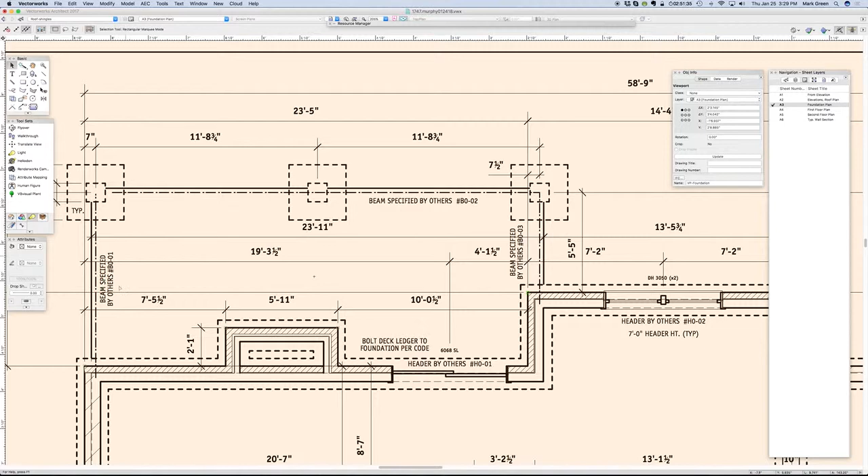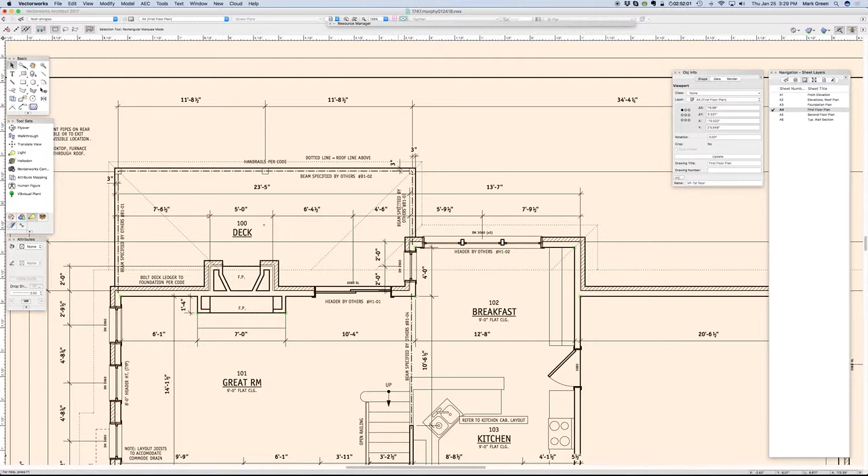So for the beams that have been placed, we're just checking that the numbering system didn't get off. So here's 01, here's 02, here's 03. There are no other beams on this floor. I know that because I did it. On this one, again, starting in the upper left, beam 01, 02 is here, 03 is here. Here's the beam here, there's 04. 05 is down here for the garage door.

Okay, so you're working both left to right, top to bottom, and or clockwise. And anything is fine as long as you don't have like 1 down here on the front porch and 2 up here in the middle of the house and 3 over here in the garage. If you're not crisscrossing back and forth, as long as there's some systematic method to the numbering, that's fine.

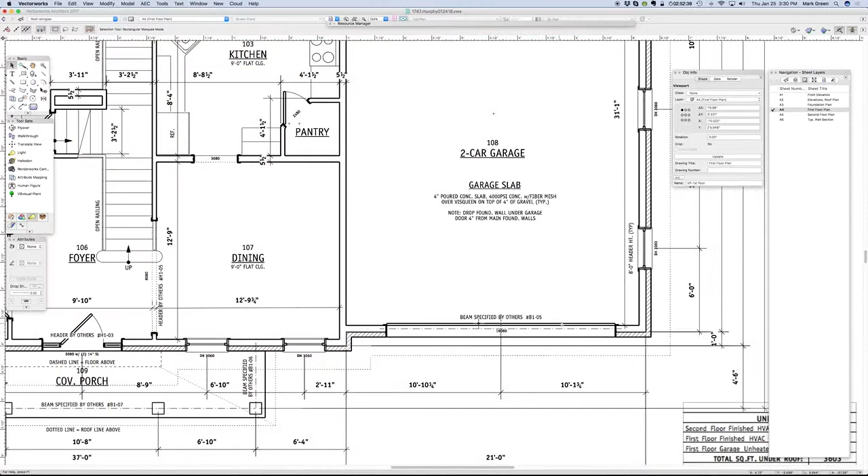So 5 is over here, and then 6 along the side of the porch, 7 along the front of the porch, and 8 along the other side of the porch. Just scan everything real carefully to make sure you've accounted for all the beams. For headers, same thing. You're going upper left, first around the perimeter, and then second through the house.

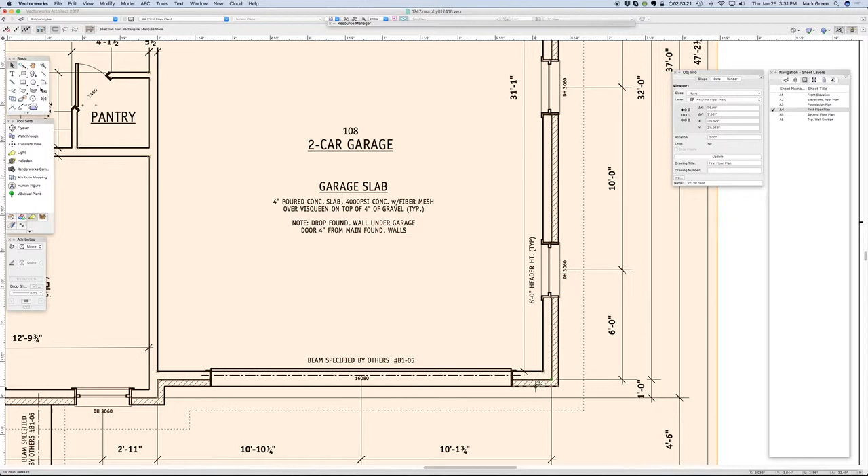Beams are always structural, like this one is structural. You got a big opening between 2 rooms. That's structural. That's not just going to be a header. A beam would also be on garage doors if you're carrying brick above, etc. They're structural in nature. If these were just regular garage doors, like 9-foot or 10-foot garage doors, it would just be a header, especially if they were in siding. If they were in brick, I'd put a beam. The note would say beam as opposed to header.

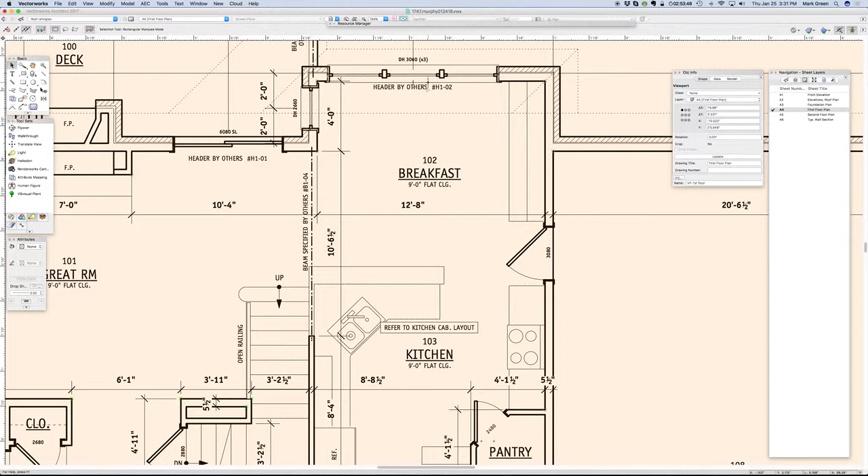Headers to me are for larger sliders or French doors or triple windows or double windows, or even inside where there's larger openings, like this one right here, double door. So again, checking, this is 1 up here, just going clockwise. 2, literally go around the entire perimeter. I come to this one, that's a beam, so skip that. I'm looking for 3. There's 3, header. And then here's 4 over here and 5 over here.

I'm looking to account for most all of the beams and headers. There's going to be another layer after me. It's going to be an engineer that's looking at this, so he will catch anything. I'm sure there will be something with this floor line here and with the beam to carry that for the second floor, but the builder didn't tell me, and I'm not going to guess how they're going to frame this up.

Up on the second floor, there were just a couple double windows on this house, and they're back here. H2 for second floor, header 2, 01, 02, and everything else was a single window, so it did not get a header. Also for this note, you're specifying in 2 or 3 locations the typical header height. So on the second floor, it's typically 8-foot tall walls and the header height is 7 foot. So I did a typical one here. There's one back here on this window, and there's one on this window back here.

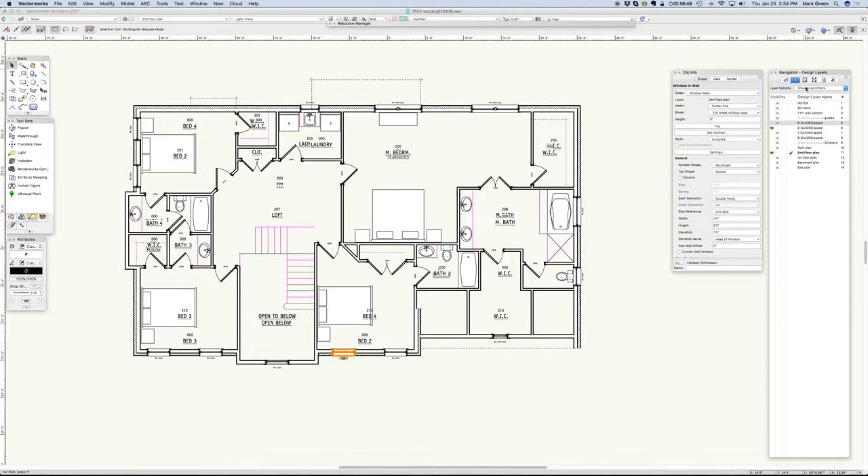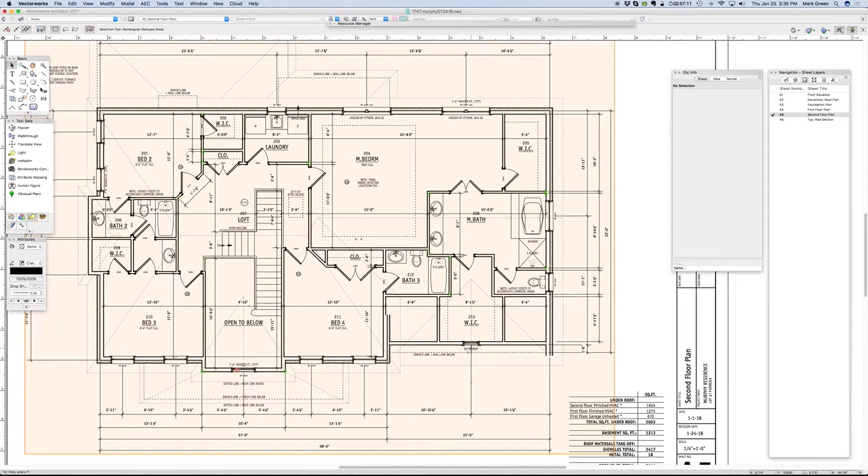If a window is different, if say these couple across the front were at 7'6", then I would go back to that. You got a typical header height of 7 foot here. First of all, I wouldn't even have that on those ones. I'd just take it off, or I'd move it to another area of the drawing where I try to triangulate. So there's one over here, there's one in the front, and there's one on the back. So I might move it over to here or something. Or just like I said, having 2 is fine also.

But if it's a window that is not typical, I would call it out. Using this note, I just duplicate it and say header height 7'6", header height 7'6", and just mark all these ones that are different than typical.